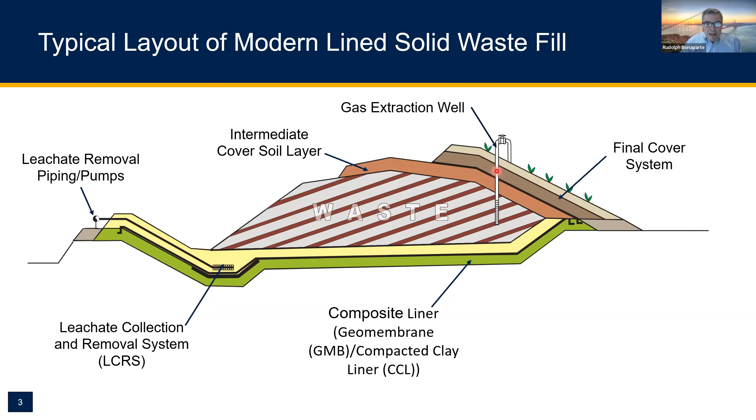This is just a typical layout for a modern lined landfill in the US. Beneath the waste mass, we can see a liner system consisting of a composite liner with a lower compacted clay or CCL component and an upper geomembrane component, overlain by a leachate collection and removal system. We see the waste mass here, an intermediate cover soil layer that I've shown here, which is going to be important to some of the failures we'll discuss subsequently, and then a final cover system. If this is a municipal waste landfill, it's likely that it'll have either a passive or active gas removal system, which I'm showing here. So these are some of the main components of a modern landfill.

As geotechnical engineers, when we design these facilities, we need to be concerned about a number of static and, if in a seismic impact zone, seismic failure modes.

These include potential failures through the waste mass itself, failures through the waste mass and liner system along liner system interfaces, failures through the waste mass and the foundation soils, and then veneer stability failures in the cover system or the liner system along liner system or cover system interfaces between soils and geosynthetics.

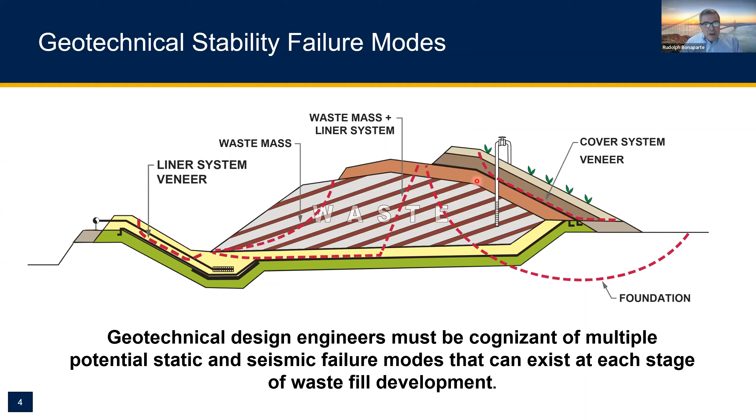For today's talk, I'm only going to focus on failure modes that involve failure through the waste mass.

So where did we start? Let's turn back the clock to the late 1980s to mid 1990s and look at three case studies: Kettleman Hills, Crossroads, and Rumpke. The first case study is Kettleman Hills, and I saw that Professor Jim Mitchell is on this webinar, and Professor Mitchell studied this failure extensively.

This is the Kettleman Hills failure. It's a waste mass and liner system interface failure, and it occurred in 1988. If we look at the liner system shown in the graphic, at the time this was one of the most sophisticated liner systems ever constructed for a landfill in the United States. It's a double composite liner system, with a secondary composite liner we can see the geomembrane and compacted clay layer, and a primary composite liner with a geomembrane and compacted clay layer.

The geomembranes in this case were smooth HDPE geomembranes. Textured geomembranes had not yet been invented. And we see the leakage detection system, also called secondary leachate collection and removal system, and the primary leachate collection and removal system, and various other layers.

So the story here is that in early 1988, a year after filling began, and with the waste mass in an interim configuration with a height of about 90 feet, 600,000 cubic yards of waste moved about 35 feet laterally over several hours. And here we see the waste cell in which the failure occurred.

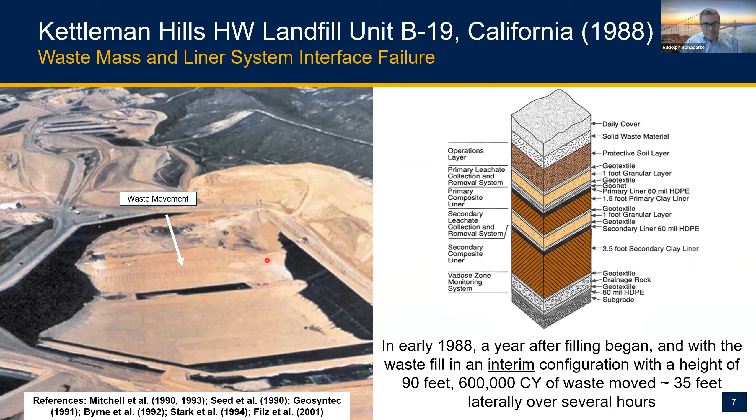Well, the post-failure investigation revealed a translational sliding mechanism along liner system interfaces. Slippage was observed to be primarily at the interface between the HDPE secondary geomembrane and the underlying secondary compacted clay liner, or CCL. And we see that here.

This is the secondary CCL layer. The secondary geomembrane that sat above it is hidden by this geotextile, but you can see the tearing of the geosynthetics and their movement down the slope.

This is a photograph taken during the failure investigation after the failure, and for scale you can see these workers here to get a sense of the size of, or the scale of the failure.

Testing after, as part of the failure investigation, showed that the interface between the HDPE geomembrane and the underlying CCL had an undrained strength of about 500 PSF, so quite low. And the studies showed that undrained failure at that interface was the appropriate mode to consider as part of the back analyses. We also found that geosynthetic interfaces were relatively weak, with measured residual friction angles of less than 10 degrees. We know this information well today.

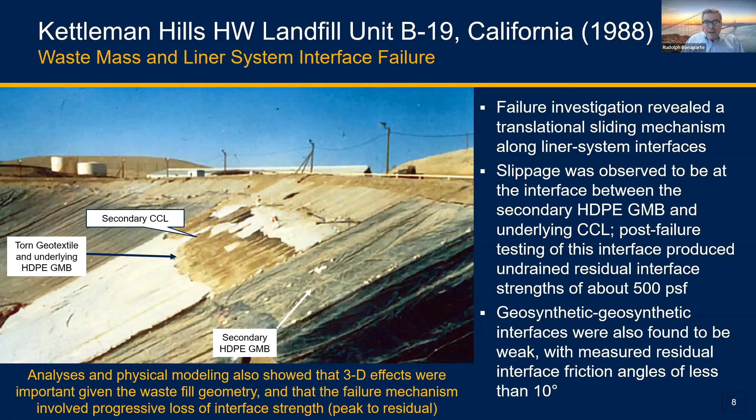The investigations, analyses, and physical modeling that was conducted after the failure also showed that 3D effects were important given the waste fill geometry, and that the failure mechanism involved progressive loss of interface strength, i.e. going from peak to residual strength.

Here are some of the interface shear testing results from the forensic investigation. On the left, we see secondary geotextile to secondary HDPE geomembrane interfaces. Now on the right, we see secondary clay CCL to secondary HDPE geomembrane.

The noteworthy thing about these interface direct shear test results is at what small displacements the peak shear resistance were developed, basically in the range of 0.1 to 0.2 inches. It took only very, very small movements that can occur actually during construction and filling of the cell to mobilize peak strengths and then move to displacements that will result in strain softening and lower strengths.

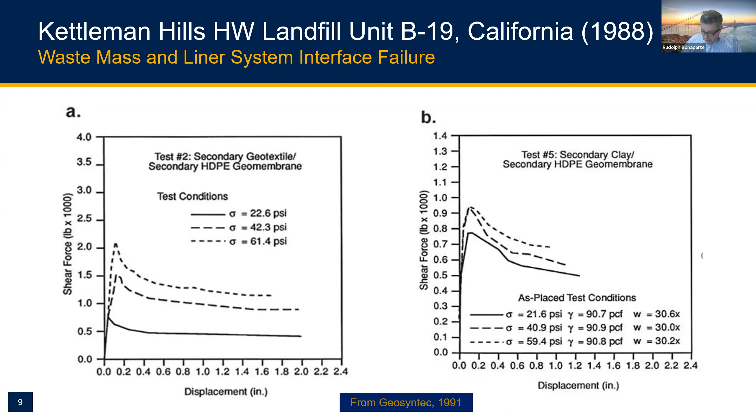So this was something that we learned, a hard lesson to learn on the Kettleman Hills failure. So to summarize, what are perhaps some of the key lessons from Kettleman Hills?

Many liner system interfaces are weak, especially if they involve smooth, high-density polyethylene geomembranes, and they exhibit pronounced shear softening with residual strengths much lower than peak strengths. Again, we know that well today. This was a big lesson learned at Kettleman.

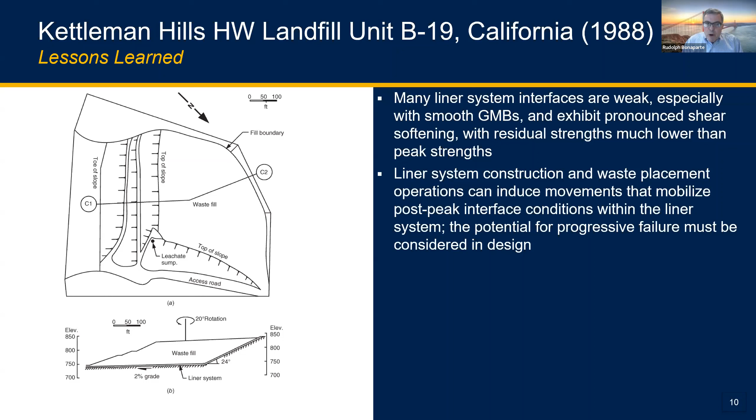Liner system construction and waste placement operations can induce movements that mobilize post-peak interface conditions within the liner system. The potential for progressive failure must be considered in design.

Waste mass stability evaluations need to address all interim waste filling configurations, not just the final configuration of the facility. As we saw here, the failure occurred during an interim configuration.

Finally, this case study revealed a conundrum: CCL compaction conditions that favor low permeability and intimate contact between the geomembrane and CCL—that being compaction at wet of optimum moisture contents, then smooth rolling the top surface of the clay before placing the geomembrane for good environmental performance—those same conditions also favor low interface shear strength. So we have to balance these two things: a desire for intimate contact and low permeability for the composite liner against the potential for low interface shear strength.

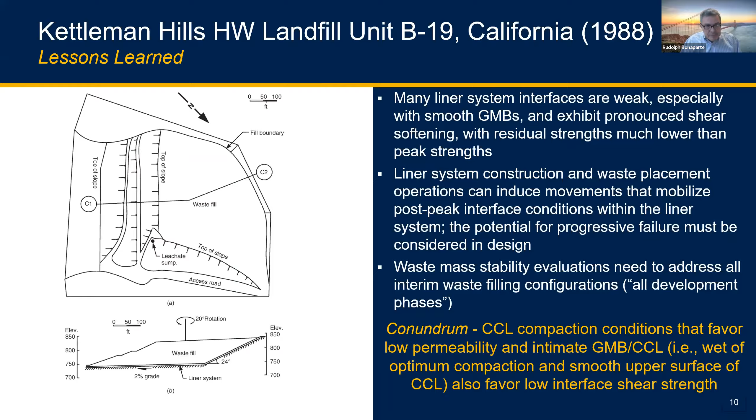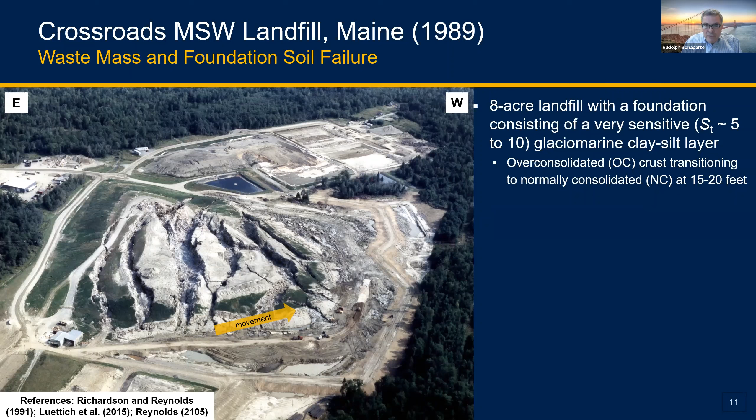So the story here is interesting. This was an 8-acre landfill with a foundation consisting of very sensitive glaciomarine clay, with a sensitivity in the range of 5 to 10. The foundation soil layer had an over-consolidated crust that transitioned to a normally consolidated state at a depth of about 15 to 20 feet.

With the waste height at 70 feet, and after a period of heavy rain, a rapid retrogressive slide occurred involving about 650,000 cubic yards of municipal solid waste. It's quite a large slide. The failure investigation showed that the sliding surface was in the normally consolidated zone below the over-consolidated crust, and that the waste blocks sitting on the over-consolidated zone basically floated to the west, moving up to 160 feet past the limits of the landfill.

The history here is quite interesting. Recognizing the nature of the foundation soils, to maintain stability, the landfill was engineered to be filled in stages based on the predicted rate of consolidation of the clay silt layer. They had piezometers in the foundation, and they would conduct periodic slope stability analyses to evaluate the factor of safety of the foundation.

They conducted an update to these analyses several months prior to the failure, and it resulted in a calculated factor of safety of about 1.0. You would think at that factor of safety, perhaps they would stop filling the landfill and wait for consolidation to occur and stability conditions to improve. But notwithstanding the low factor of safety, waste disposal continued.

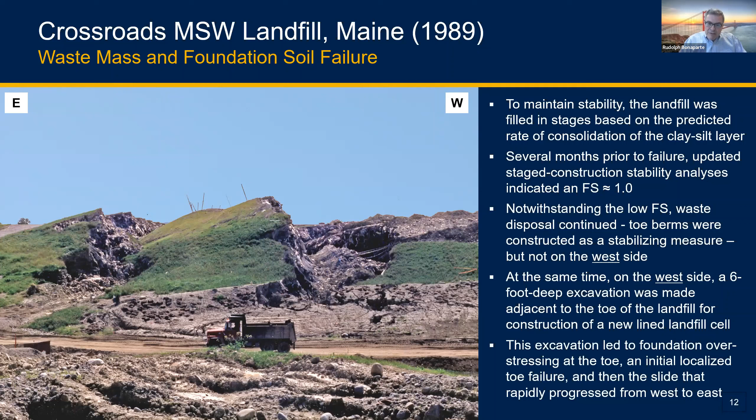So you can imagine what happened. The excavation led to foundation overstressing at the toe and an initial localized toe failure, and then the retrogressive slide back across the rest of the site.

There were a number of challenges with the engineering here. The failure investigation showed that the foundation soil strengths were underestimated by about 25 to 30%, so the foundation was actually stronger than they realized at the time. But on the other hand, the engineers significantly underestimated the unit weight of the waste by about the same percentage, 25 to 30%. So these things kind of counterbalance themselves.

And while they were measuring pore pressures in the foundation, the engineers did not think to measure pore pressures within the waste mass itself. It turns out, when the investigation was conducted after the failure, that this was a very wet landfill and leachate had pooled up at the base of the landfill, so there were internal pore pressures within the system.

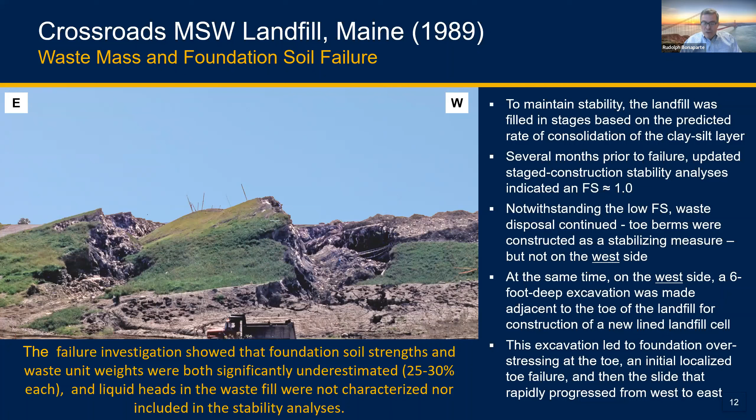So some of the lessons learned: both waste and foundation unit weights and shear strengths must be adequately characterized. That seems obvious now, perhaps didn't get enough attention at the time. Waste self-weight is by far the largest contributor to foundation loading, hence the importance of proper characterization. Again, we know that now. We didn't know it so well back then.

A clear understanding of the liquid levels and pore pressure conditions in the waste fill are critical to the satisfactory assessment of waste fill stability.

And each significant construction and/or operational change in the field should be evaluated prior to implementing change. In this case, the excavation at the toe apparently didn't get evaluated for what that excavation might do to the stability at the toe.

And then for soft soil sites, the rate of waste filling may need to be limited by the rate of foundation soil consolidation and strength gain. This is a classical staged geotechnical construction condition that must be thoroughly understood.

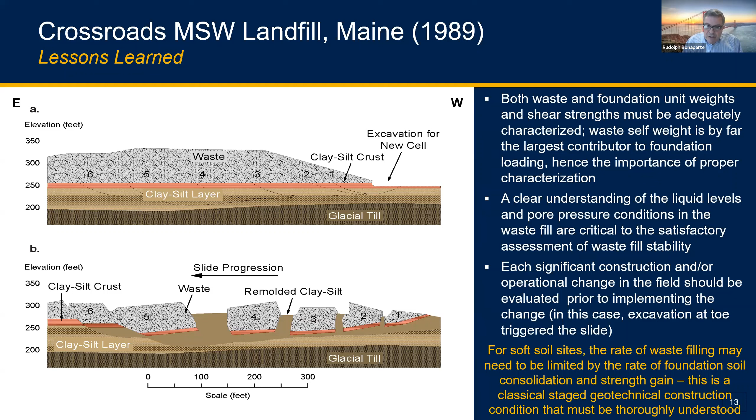The third historical failure we will look at occurred at the Rumpke landfill in the state of Ohio in 1996. This is another waste mass and foundation failure. This is a large landfill, about 120 acres in size.

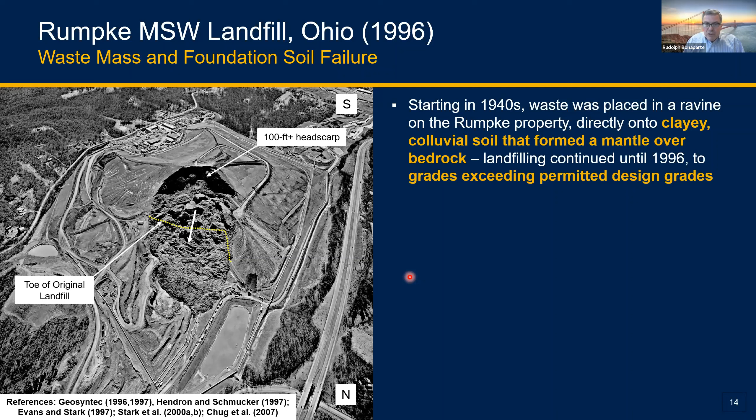So the story here is that starting in the 1940s, waste was placed in a ravine on the Rumpke property directly onto clayey colluvial soil that formed a mantle over bedrock. Landfilling continued until 1996 to grades exceeding permitted design grades. Those highlighted things there are important factors in this failure investigation.

A week prior to failure, tension cracks were observed up near the eventual headscarp area. The morning of the slide, the toe of the landfill began to move, and the tension cracks at the crest were observed to be growing wider.

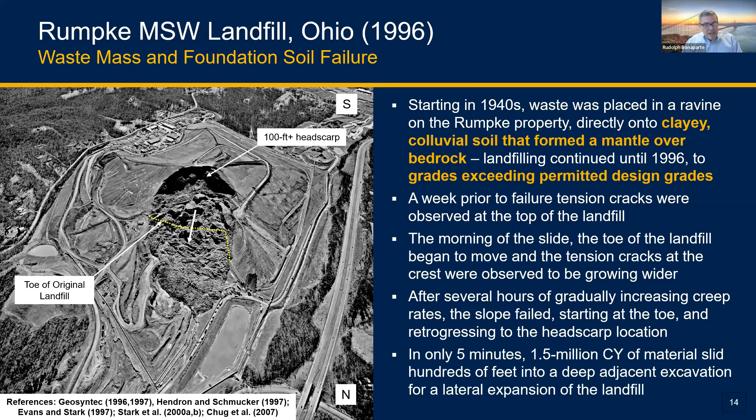And then after several hours of gradually increasing creep rates, the slope failed, starting at the toe and retrogressing to the headscarp. This all happened in only 5 minutes and involved about 1.5 million cubic yards of material that slid, as already said, into the adjacent excavation.

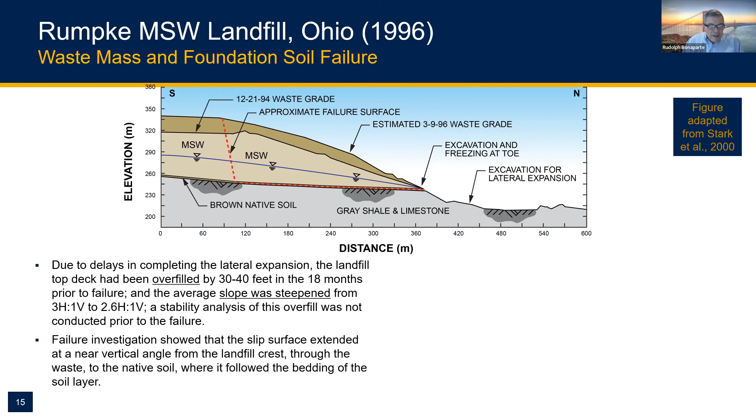The failure investigation showed that the slip surface extended at a near vertical angle from the landfill crest through the waste to the native soil, where it followed the bedding of the soil layer.

The investigation determined that leachate levels in the waste mass at failure were substantial, up to about 30 to 40 feet.

Post-failure shear testing conducted at Geosyntec and by Tim Stark at the University of Illinois, parallel testing programs, showed that the native soil produced fully softened and residual friction angles in the range of 20 and 8 degrees respectively. Slope stability back analyses using the leachate levels and slip surface shown revealed a mobilized average friction angle at failure of about 12 degrees, between the fully softened and residual values.

So the failure mechanism for this slide seems pretty obvious. It involves overstressing and progressive strength loss of the native soil due to overfilling and the buildup of leachate levels.

So what are some of the lessons learned from Rumpke? First, foundation conditions for old unlined waste fills must be thoroughly understood if additional filling, excavation, or expansion of the fill is planned.

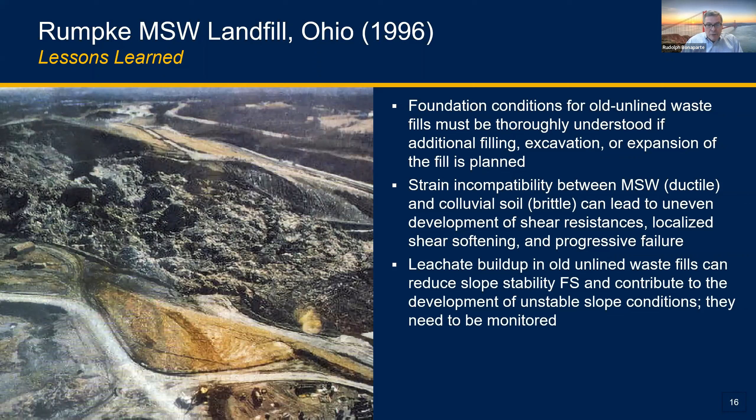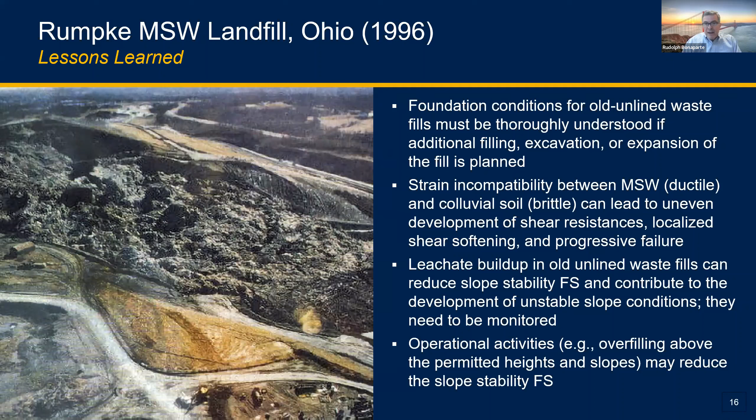Leachate buildup in old unlined waste fills can reduce slope stability factors of safety and contribute to the development of unstable slope conditions. They need to be monitored. These liquid conditions in the old fill should be monitored. And operational activities, in this case overfilling above the permitted height, landfill height and slopes, may reduce the slope stability factor of safety and lead to problems.

What did we learn by the mid-1990s? Through those case histories and others, here are some of the things that we learned.

First, don't forget fundamental soil mechanics. Fundamental geotechnical engineering applied to all of these landfill failures, and we can learn from that. Importantly, waste materials have geotechnical properties that must be characterized.

Liquid and gas conditions in the fill are important. They can create elevated pore pressures that can lead to failure or other problems. We know that well now. We didn't know it so well back then.

Soil and geosynthetic interface strengths must be characterized, both the peak and residual values. Mobilized strength compatibility is often an issue. Waste, particularly MSW, is often ductile. Geosynthetic interfaces can often be brittle and strain softening.

And the foundations come in all flavors. They can be sensitive, brittle, strain softening. We can have undrained or drained conditions. We can have liquefiable deposits.

Progressive failure mechanisms must often be considered. Time-dependent staged loading response must be addressed at soft soil sites. Numerous interim waste configurations often require assessment. Operating conditions in the field often deviate from the original design.

We need to approach expansions on top of old unlined landfills with caution and with careful stability assessments. Surface cracking and toe bulging may be considered signs of incipient failure. And communications between engineers and operators are critically important, not only at the design and initial construction phase, but throughout the life of the facility.

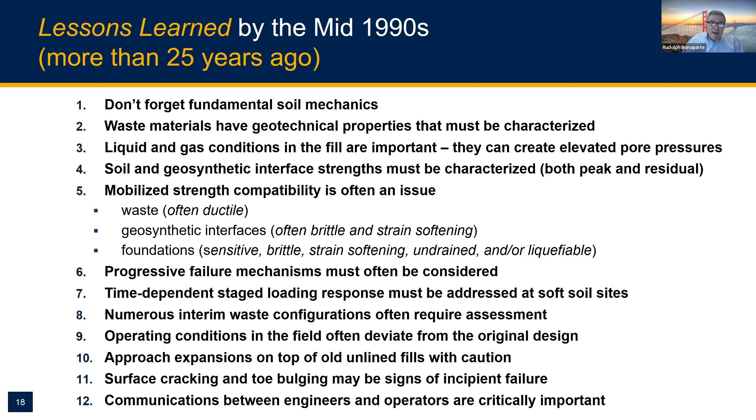So these are some of the important lessons learned more than 25 years ago. Let's fast forward now in time, and from today's vantage point, see what's been happening in the US landfill industry and at these facilities over the past decade.

I'll start by saying that I'm personally knowledgeable of all of the landfills listed here. You can see some of them have names and some are confidential, because they're private facilities and the landfill owners didn't want the facilities publicized. If I've been involved with these facilities, I imagine there are a significant number of others where there have been problems that I'm not knowledgeable about, but other engineers and regulators have been. So the takeaway is that we've continued over the past decade to see a relatively large number of landfill stability problems in the United States.

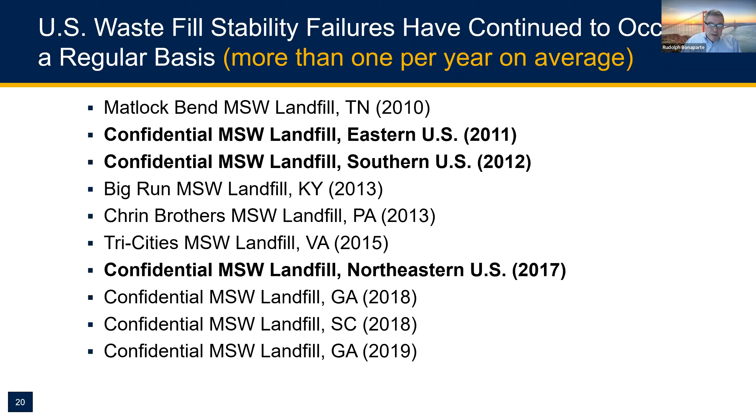I'm going to talk about the three shown here. The owners have given me, and given Geosyntec, permission to talk about them. We just cannot name the facilities specifically or give their specific location. But there's a lot to be learned from each.

The first more modern waste failure occurred in 2011 at a very large MSW landfill in the mid-Atlantic region of the United States. As we'll see, this is a waste mass and intermediate cover soil interface failure. The failure occurred in September 2011 after nearly 16 inches of rain fell on this site over a month due to the occurrence of 2 hurricanes passing over the site.

At the time of the failure, waste filling had recently been completed in a landfill expansion built over the 190-foot tall slope of a previously filled landfill cell. This is the old landfill cell, and what we're seeing along these outboard slopes is a 100-foot wide veneer of newer solid waste that was stacked up against the slopes of the older landfill.

This was a very wet landfill. Leachate recirculation at the site had been going on for years and years. High levels of stormwater infiltration occurred because of poor stormwater management practices in a very large open top deck that wasn't graded to drain. And dewatered sewage sludge, which is still very wet even though it's dewatered, was being accepted for disposal.

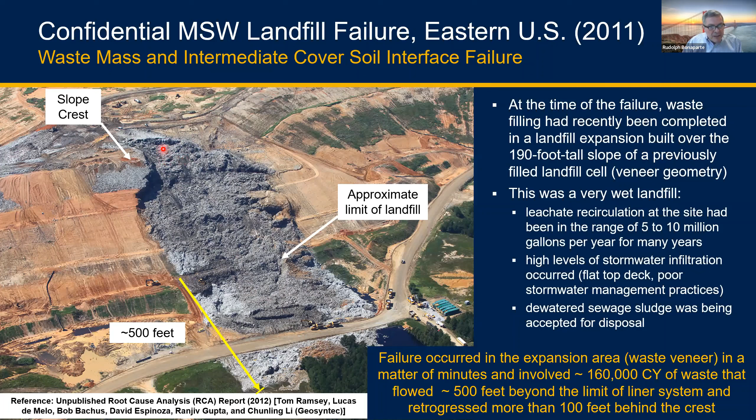So all of these things contributed to high moisture contents in the landfill. Failure occurred in the expansion area in a matter of minutes and involved about 160,000 cubic yards of waste that flowed about 500 feet past the toe of the landfill. Here's the toe of the landfill, and the waste ran out this long distance here over a relatively flat area. The waste failure also retrogressed about 100 feet behind the crest of the landfill.

The failure investigation showed that the slip surface was at the interface between the expansion area waste and the underlying intermediate cover soil. We could see this. This is all intermediate soil cover for the old landfill, and the failure involved sliding over this material here. Here is the toe of the landfill.

CPTU testing, 20 soundings as part of the failure investigation, were conducted around the perimeter of the failed area. And these soundings showed high piezometric levels in the expansion area waste all around the failure area. So presumably they were similar in the failure area at the time of failure.

On-site observations the day after the slide revealed leachate pools and gas vents within the failure area, which were clear evidence of a wet, pressurized fill.

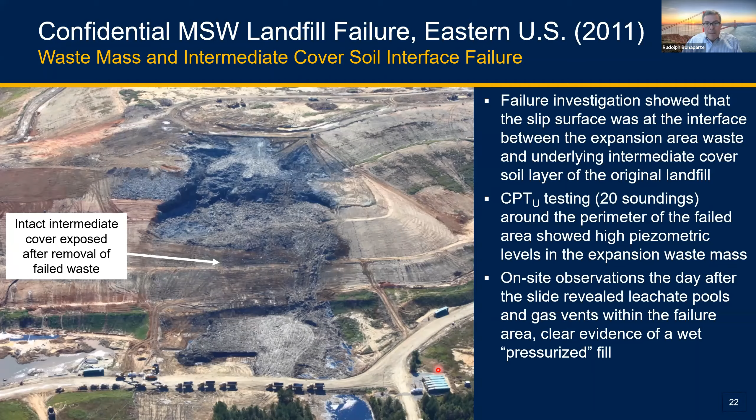Here we see an idealized cross-section of the landfill before the failure. The dark brown is the original landfill with a good liner system below it. I want to draw your attention to the intermediate soil cover layer that went down this entire slope. It was a low permeability soil layer. And we see the waste that was stacked up against the old landfill here, about 190 feet high with 3-to-1 slopes and several benches.

And we see the location of the slip surface for this case. Now, importantly, this intermediate soil cover layer acted, if you will, as a compacted clay liner, perhaps an imperfect one, but to some degree prevented leachate accumulating in the expansion from percolating down into the old landfill and down to the original leachate collection and removal system. Moreover, with this condition, there was no new leachate collection and removal system installed above that intermediate cover soil layer.

Here we see the failure condition after the slide, obviously, when we can see the waste mass, how it moved, and the large run out of material about 500 feet beyond the toe of the slope. So because of all the liquid and gas pressure in this facility, when it did fail, the waste more or less liquefied and ran out a long distance.

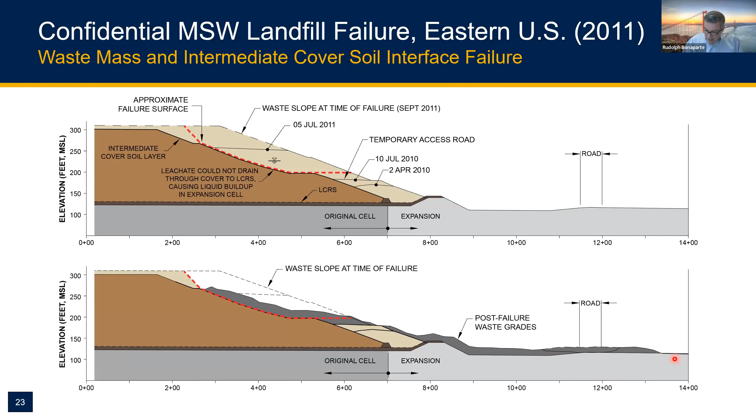So slope stability back analyses were conducted using the CPTU-derived piezometric levels and the observed failure surface as shown on the left-hand side. And these resulted in a drained waste friction angle of 20 degrees with a very small cohesion to achieve a factor of safety of 1.0.

At the same time, we collected samples of the waste materials and shipped them to Ed Kavazanjian at Arizona State University to do direct shear testing in its 300 millimeter diameter direct shear box. And those tests resulted in friction angles at the appropriate normal stresses in the range of 20 to 24 degrees.

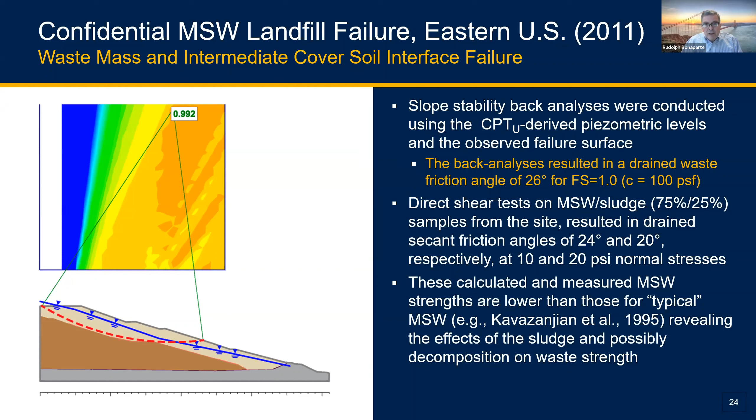And these calculated and measured MSW shear strengths are lower than those we typically think of for municipal solid waste landfills, in the range of 31, 32, 33, 34 degrees. Those are typical values that we use. So things in the range of the low to mid-20 degree range are low. And we believe this was due to the presence of the sludge and possibly some advanced decomposition due to the high moisture content and the presence of the sludge.

So what did we learn from this case study? Excessive leachate recirculation and stormwater infiltration can lead to the buildup of elevated liquid levels and pore pressures in the waste.

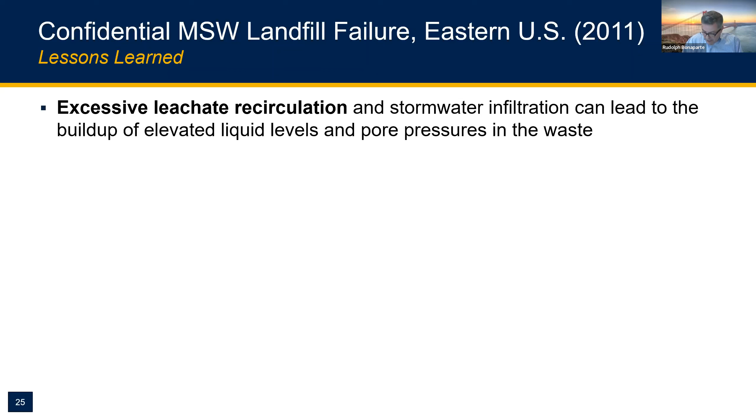Vertical expansions that involve the placement of new waste over old need to account for the interface conditions. In this case, a low permeability intermediate cover impeded leachate percolation from the expansion area down to the original leachate collection and removal system, contributing to leachate buildup. Either that intermediate cover needed to be removed before placing the newer waste, or a new LCRS needed to be constructed on top of it.

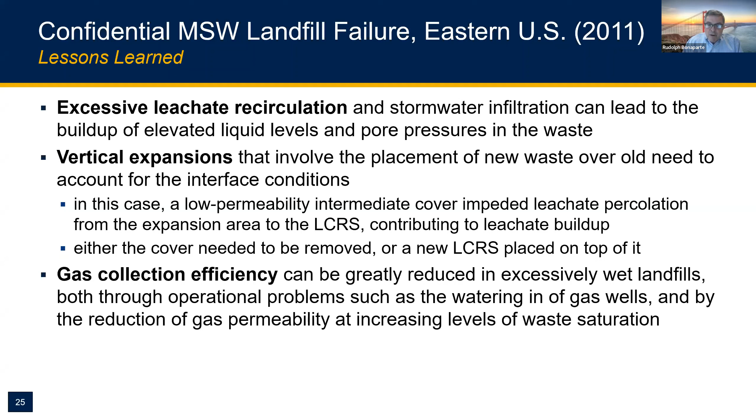Very important, something we've learned over the past decade: gas collection efficiency can be greatly reduced in excessively wet landfills, both through operational problems such as the watering in of gas wells, and by the reduction of gas permeability at increasing levels of waste saturation.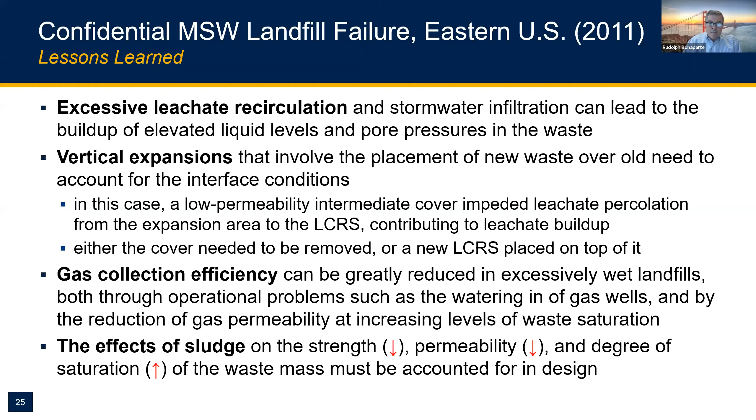And finally, the effects of sludge must be accounted for in the design. Adding significant amounts of sludge to municipal solid waste reduces shear strength, reduces permeability, and increases the degree of saturation. All things that can have an adverse effect on stability. So a lot of lessons learned with this case study.

The second, more modern waste fill failure occurred in 2012 at a large MSW landfill in the Gulf Coast region of the United States. This is a waste mass and foundation failure. The landfill cell of interest is about 9 acres in size. You can see the failure in this photograph.

This is the waste mass that failed by sliding from east to west, more or less as a monolith on the clay foundation beneath it, and I'll explain that in a moment. You can see the large graben behind the failure mass. You get a clear sense of how it moved from this photograph, approximately 25 feet east to west. So another interesting story here.

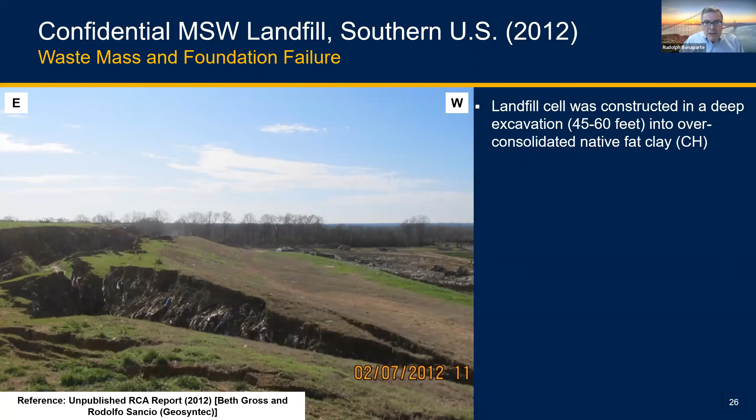The landfill cell was constructed in a deep excavation, approximately 45 to 60 feet deep, into very heavily over-consolidated native fat clay.

Timeline is important. The excavation occurred in 1996 to obtain borrow soil for ongoing site operations. Liner system construction did not begin in that area until 2007. So for more than a decade, stormwater ponded in the cell bottom. Think about that from a geotechnical engineering point of view: a decade of water ponding on an excavated cell of highly over-consolidated fat clay.

The liner system was a CCL on the bottom and a geomembrane on the side slopes with sand, and a leachate collection and removal system for both, but it was not a factor in the failure. I won't talk about it anymore.

So waste filling occurred after the liner system was built, from mid-2007 to early 2009, creating a slope 95 feet high with a 4 horizontal to 1 vertical inclination. Not a remarkable slope at all. Very common. One wouldn't expect slope stability problems with a slope like that.

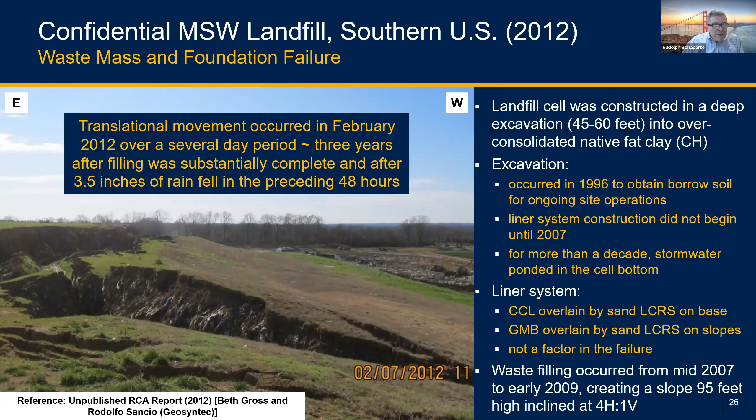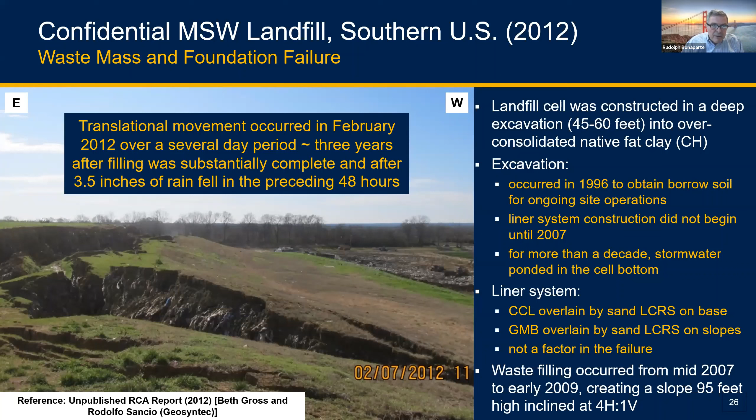The translational movement of this slide occurred in February 2012 over a several-day period, so it was kind of a slow translational movement, 3 years after filling was substantially complete, and after 3.5 inches of rain fell in the preceding 48 hours.

Here we see an aerial view of the slide. You see the graben area back here, the translational movement about 25 feet from east to west. And for scale, we see a large trash compactor and some large haul trucks. It gives you a scale of the slide area.

So the first signs of a problem occurred 3 months prior to the failure, when north-south oriented cracks developed at the eventual location of the slide headscarp, right in this area here. The owner-operator filled the cracks, but they were reopened with time, typically after rain events.

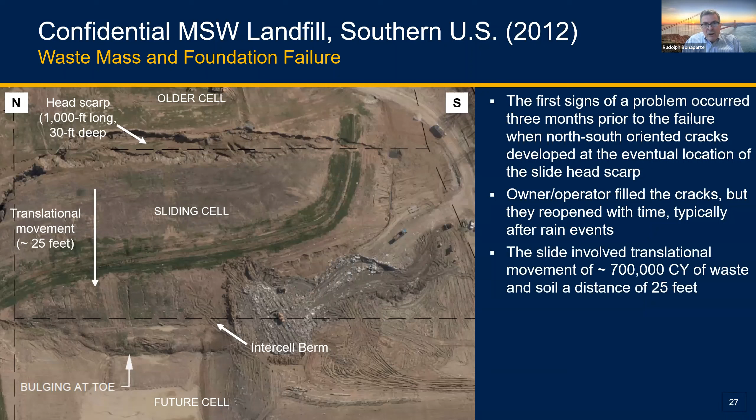The slide involved translational movement of about 700,000 cubic yards of waste and soil, moving a distance of about 25 feet, as I've already mentioned. The failure investigation concluded that the failure mechanism involved shallow translational movement in the native clay beneath the bottom of the liner.

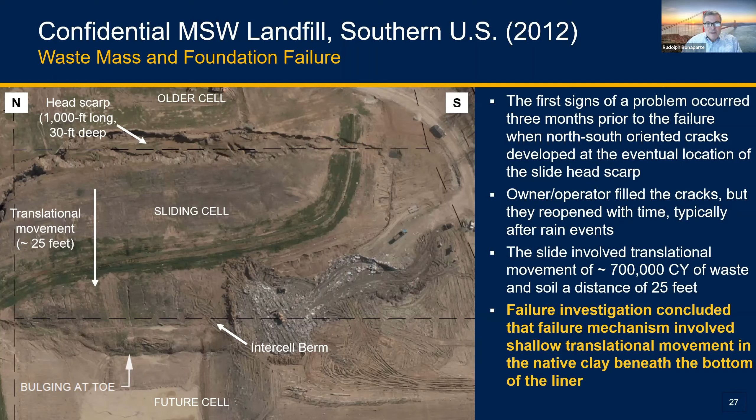As part of our failure investigation, we again advanced a fairly large number of CPTU soundings, along with 5 soil borings. 34 Shelby tube samples were taken, and from that, a fairly large number of laboratory tests were conducted, including torsional ring shear testing and direct shear testing to obtain residual shear strength values and fully softened shear strength values. On the left-hand plot, we see an example of some of the torsional ring shear testing that was conducted on the over-consolidated material.

And on the right, the shear strength envelopes we developed for slope stability analyses. We see the fully softened shear strength with a fully softened shear strength friction angle of 13.1 degrees and a relatively small cohesion as a design shear strength envelope. And for the residual value, 6.7 degrees with a very small cohesion for this envelope.

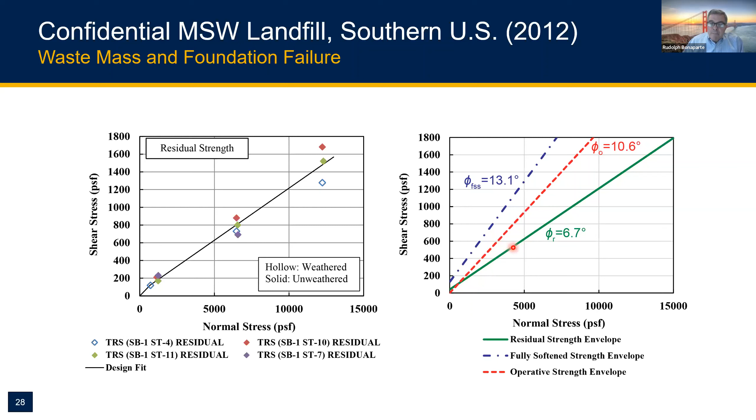Also shown on this plot is something we call the operative strength envelope. This is the strength envelope we back-calculated from slope stability analysis to attain a factor of safety of 1 at the initiation of failure for the slope. One can see that it falls sort of midway between the fully softened shear strength and the residual friction angle of this material.

We weren't able to get good data on pore pressures at the time of failure along the slip surface. We considered that the failure was under drained conditions, so we conducted a two-part stability analysis to estimate a pore pressure coefficient to use in the slope stability analysis. We first conducted a post-failure analysis based on the 25 feet of movement and the geometry of the slide mass after that movement, considering that the shearing resistance along the slip surface was controlled by the residual friction angle of the soil material. With that assumption, we calculated a pore pressure coefficient, R sub U, an average value for the slip surface.

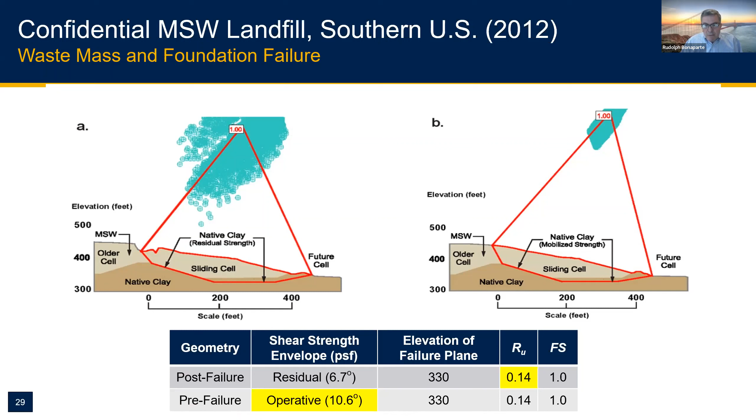Equal to about 0.14. We thought this was a reasonable value because it corresponded to a roughly hydrostatic pore pressure distribution from zero at the elevation of the leachate collection and removal system—a drainage boundary—to a hydrostatic value at the depth of the slip surface. We then took that pore pressure coefficient and applied it to the pre-failure condition, before movement had started, using that coefficient and the slip surface location with the waste mass in its pre-failure configuration to calculate an operative shear strength of about 10.6 degrees, so between fully softened and residual values.

So the lessons learned here—well, let's go back to basic soil mechanics. The decade-long open excavation allowed ponded water to infiltrate the native clay through desiccation cracks and slickensides. This led to swelling and softening of the clay and the development of fully softened shear strength conditions in the zone beneath where the liner system was ultimately constructed. The failure surface was roughly in the range of about 5 to 8 feet below the bottom of the liner system, as best as we can determine.

After that, the liner system was installed and the cell was filled, and the stresses generated by the waste slope induced shear deformations in the weakened native clay, leading to progressive strength loss and ultimately failure. To a minor degree, the buildup of pore pressures at the back of the slope over time, related to the cracking observed, was a small contributor that perhaps helped trigger the slide. But the biggest driver was this softening of the clay over a decade prior to construction of the cell. In summary, a deep understanding and application of geotechnical fundamentals is essential to waste fill stability evaluations, just as it is to natural slopes and constructed embankment fills.

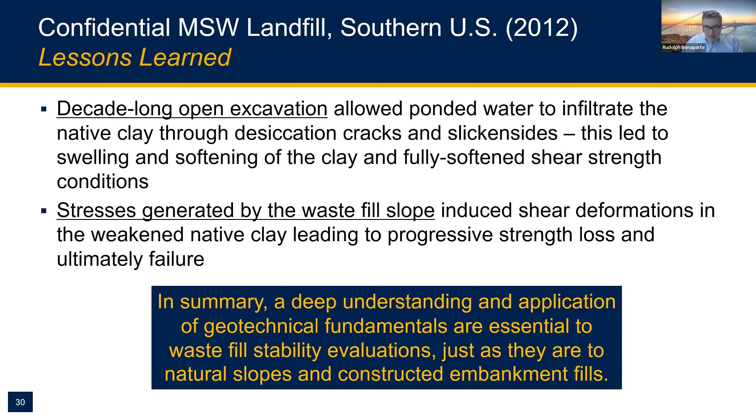The third and final modern landfill failure occurred in the Northeast US in early 2017. This is a waste mass failure that did not involve the liner system. We see a photograph of the failed waste mass—here you can see it's a large debris field. For scale, here is a large haul truck, and here's a tractor trailer and cab right in the middle of the waste mass.

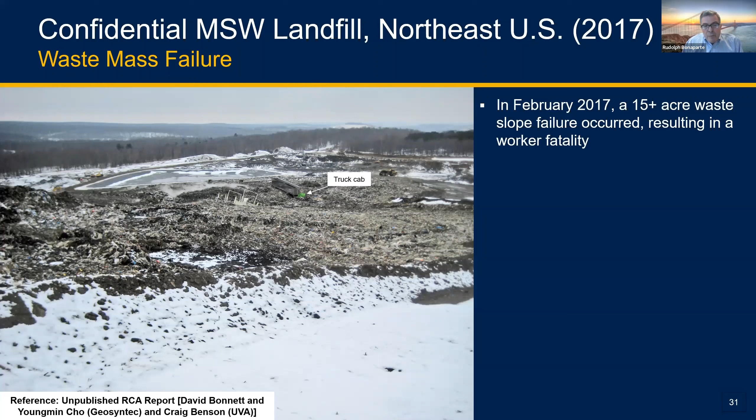This failure occurred in February 2017, a little over 5 years ago, and it involved a 15-acre portion of the slope, and sadly it resulted in a worker fatality. In the weeks leading up to this failure, surface cracking, slope bulging, leachate seeps, and gas venting were all observed in this area. At the time of the failure, the owner, recognizing that they had a landfill cell that was essentially cooking and doing bad things, was trying to install additional gas wells to relieve gas pressure and improve conditions.

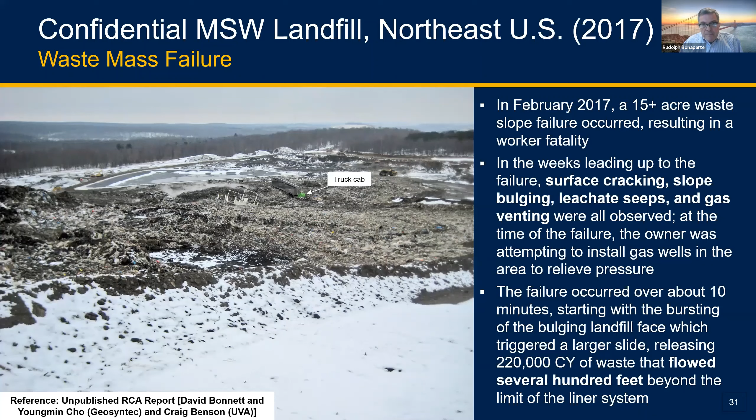Another very rapid failure—it occurred over about 10 minutes, starting with the bursting of the bulging faces of the outboard landfill slope in two areas, then rapidly triggering a much larger slide that resulted in about 220,000 cubic yards of waste moving several hundred feet beyond the limit of the landfill. So like the case history two case histories ago: a very wet landfill, high pore pressures, liquefied waste, and large runout of material. There are other commonalities as well, as you'll see. This is an aerial photo of the waste mass.

So it's important to understand the operations here. The area where the failure occurred involved an expansion of a new waste cell against the intermediate soil cover of an older portion of the landfill. So like the previous case study, again, a veneer configuration.

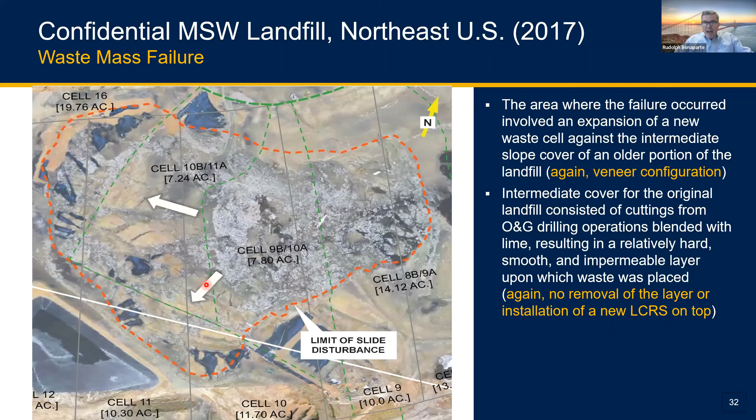Intermediate cover soil for the original landfill consisted of cuttings from oil and gas drilling. This was in the Marcellus shale part of the United States, so there were a lot of oil and gas drilling operations at the time, blended with lime. This resulted in a relatively hard, smooth, and impermeable layer upon which the waste was placed. As part of the expansion, once again, there was no removal of the layer and no installation of a leachate collection and removal system on top of it.

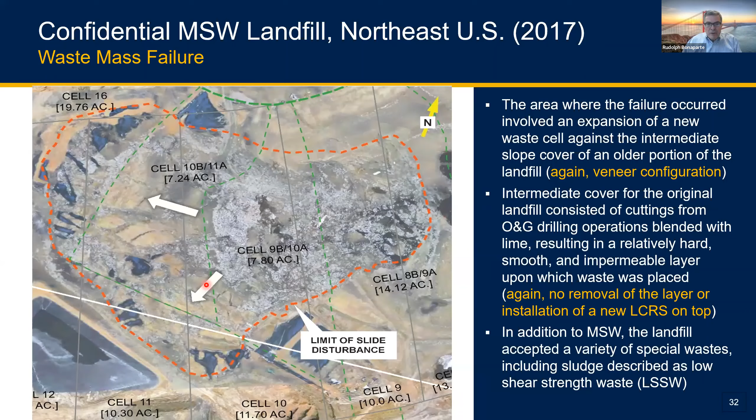In addition to MSW, the landfill accepted a variety of special wastes, including sludge, which was described at the site as LSSW, low shear strength waste. So clearly they understood they had a low shear strength material.

This is a drawing of a GIS configuration of the landfill. That 90-degree angle is shown here, so we're looking at it from a different perspective. This is a failure of the eastern face and the southern face.

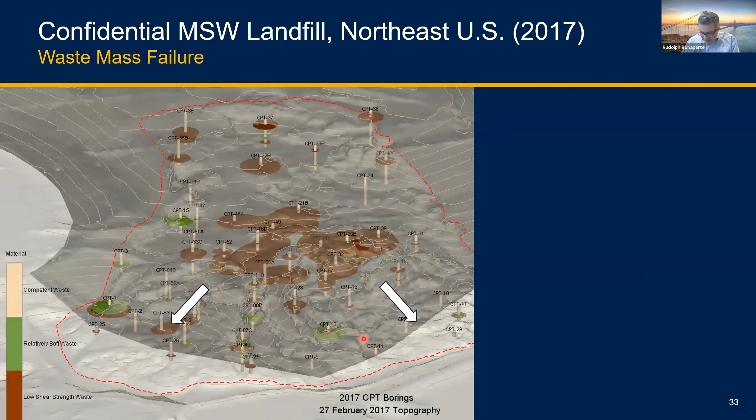These brown areas are delineated from the CPTU testing we conducted throughout this cell after the failure, and these are areas of high concentrations of low shear strength waste. You can see they're set back from the face, and there's a reason for that. The operations plan for the landfill required that this LSSW be placed at least 100 feet back from the slope to prevent leachate seeps and to maintain stability.

A good idea in and of itself, but the setback limited the cell area in which the LSSW could be placed and the amount of MSW available for mixing with this weak material. That's because due to this 90-degree angle, quickly as you came up the landfill, that cell was getting smaller and smaller, and you concentrated all the LSSW in a smaller and smaller area of the landfill confined by this 90-degree angle.

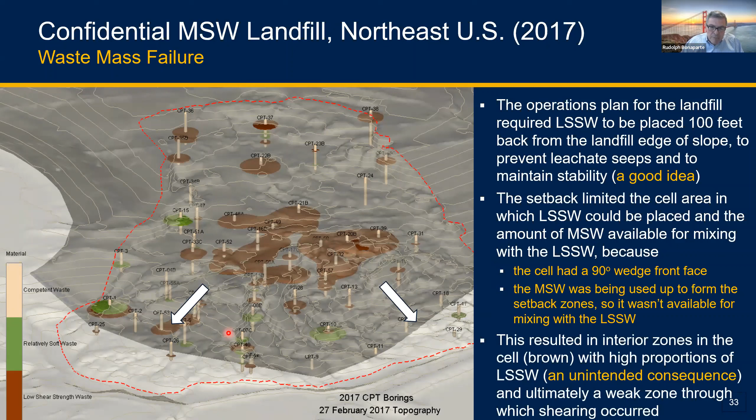In addition, the MSW that was coming in was being used to construct this 100-foot wide buttress zone. That was a good thing, but there wasn't much MSW to mix with the weak material in the center of the cell, so you got high concentrations of this material. This resulted in interior zones in the cell, shown in brown, with high concentrations of LSSW - an unintended consequence of a good idea, and ultimately a weak zone through which shearing occurred.

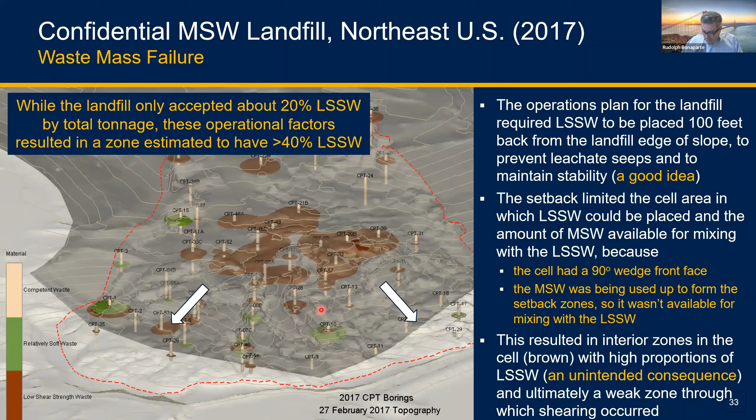While the landfill only accepted about 20% LSSW by total tonnage, these operational factors contributed to large areas of the cell with more than 40% LSSW. And that's important based on the shear testing that was conducted.

We collected samples of MSW, shown here, looks like typical MSW, and the LSSW, shown here, looks like typical sludge, and sent them to Colorado State University for testing in their 300 millimeter wide direct shear apparatus. We tested MSW, LSSW, and mixtures of the material, and the test results are shown here.

In the interest of time, not going through them in detail, what we found is that once you got to about 30 to 40% LSSW, you started to get significant decreases in the shear strength of the mixed material. And we saw we had high concentrations of the material in the cell, as seen in the previous slide.

So the failure investigation slope stability analysis showed that multiple combinations of MSW and LSSW shear strengths, coupled with estimated pre-failure liquid and gas pore pressures in the waste, produced factor of safety values at or less than 1.0. So this explained the reasons for the failure at this landfill.

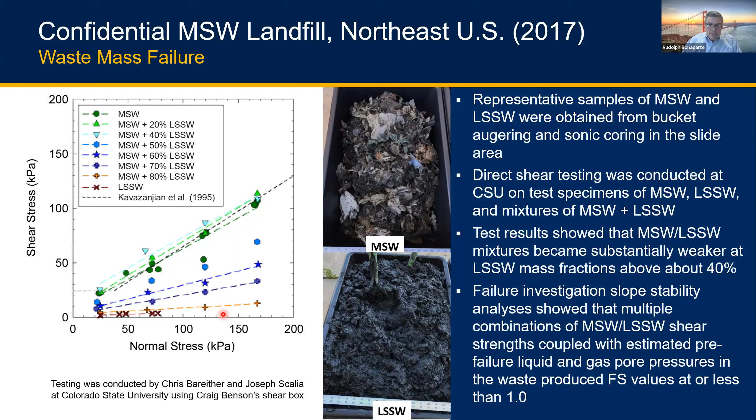The lessons learned in this case: special waste can create operational problems. Procedures developed to mitigate the problems can have unintended consequences.

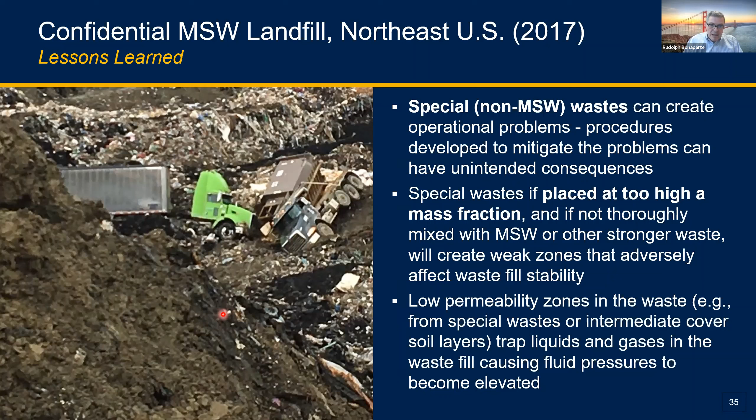Special waste, if placed at too high a mass fraction and not thoroughly mixed with MSW or other stronger waste, will create weak zones that adversely affect waste fill stability. Low permeability zones in the waste, whether from intermediate cover soil layers or other reasons, will trap liquids and gases, causing fluid pressures to become elevated. We saw that in the previous case study, and we saw it in this case study. These are things we've learned in the last decade.

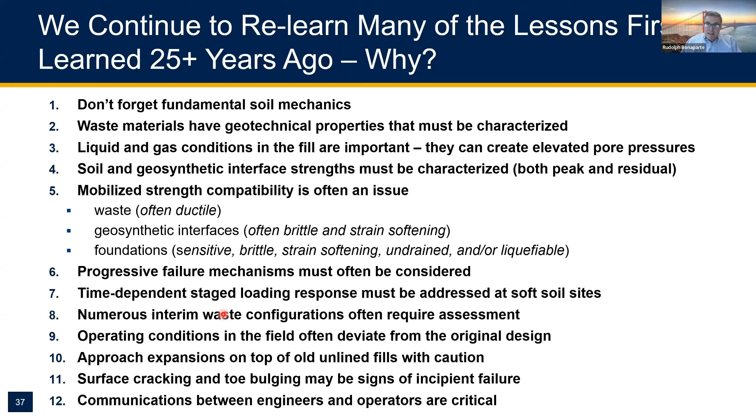So with that, I'll wrap up with some final observations and recommendations in light of these continuing challenges we've seen in the last decade. First, in many ways we continue to relearn many of the lessons we first learned 25 or more years ago, and we need to think about the reasons. We need to elevate the practice, both here in the United States and around the world, in our evaluation, operation, and design of these types of facilities.

With respect to all the lessons learned from the more recent failures, I'll identify just five here on this final slide. Aggressive leachate recirculation can saturate waste and cause high piezometric levels. Gas well collection efficiency can be substantially diminished in very wet landfills, leading to the potential for gas pressure buildup, and we saw that in several of the case studies. High moisture content landfills can lead to elevated temperatures in some cases, and while I didn't talk about it today, that was the case in two of the failures.

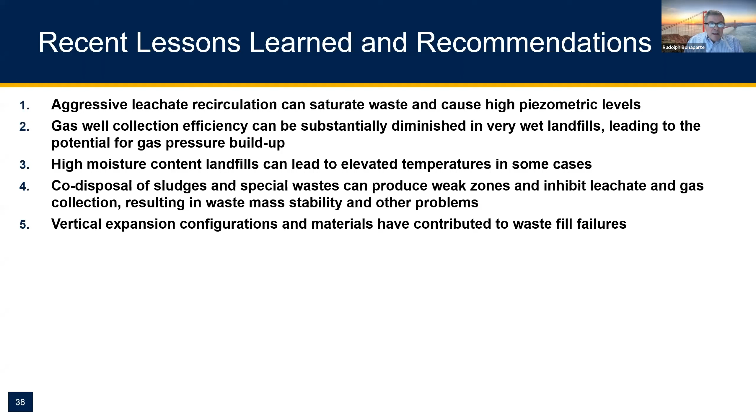Co-disposal of sludges and special waste can produce weak zones and inhibit leachate and gas collection, resulting in waste mass stability and other problems. And finally, vertical expansion configurations and materials can contribute to waste fill failures, and we need to carefully engineer them when those kinds of expansions are being undertaken.

A few lessons learned, first with respect to leachate recirculation. We need to limit leachate recirculation rates to avoid saturating the fill and inhibiting gas collection. A proper water balance is needed to achieve that and to maintain appropriate moisture contents in the fill, and this requires monitoring of liquid levels and pressures within the waste mass. Landfill internal drainage features must have adequate capacity to drain recirculated liquids or liquids from other sources.

So this is something that needs to be kept in mind. The types of features that need to be designed in many cases are in addition to the leachate collection and removal system.

Sludges and special waste: whenever facilities are accepting special waste, they should develop special waste acceptance plans for each waste stream. These SWAPs should address potential impacts to leachate and gas generation, waste properties, slope stability, and operations. We need to think carefully about unintended consequences of the special waste operating procedures we develop, so that we don't have an unintended consequence. A high level of operating vigilance is needed, which is very consistent with the observational approach we use in geotechnical engineering.

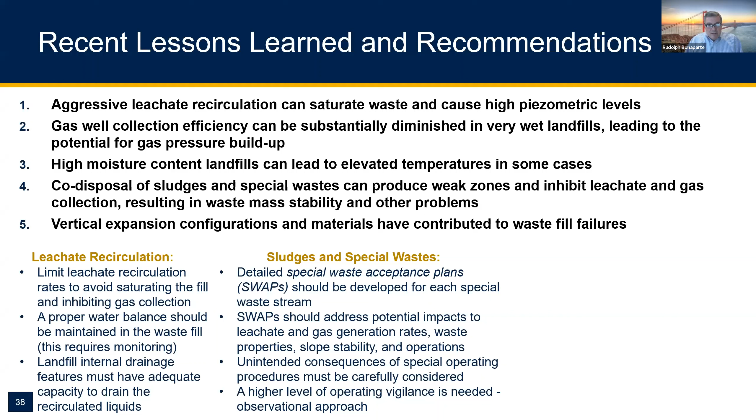And finally, for vertical expansions, I think you know what I'm going to say here. The intermediate cover interface must be carefully engineered for stability and permeability. In some cases, that cover should be removed, and in others, a new leachate collection and removal system should be installed on top of the cover. Finally, the effects of the vertical expansion on leachate and gas movements in the waste need to be carefully assessed.

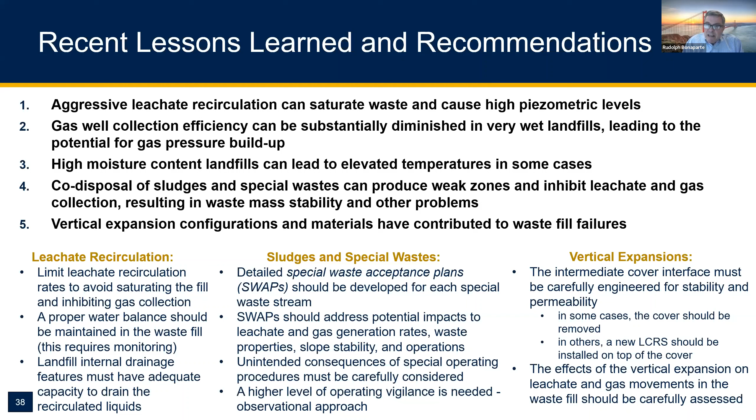So with that, I thank you for your attention.